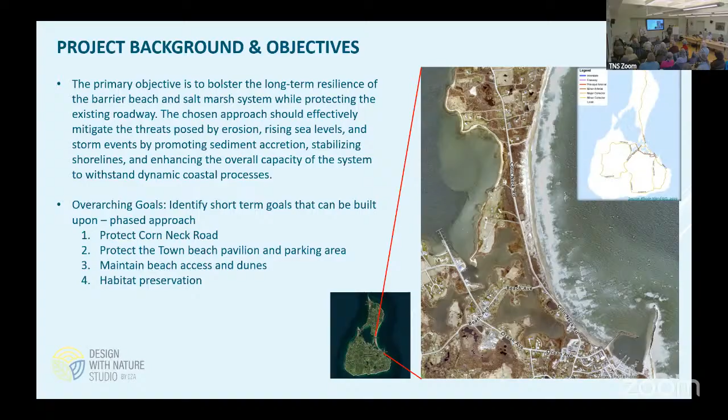This shows a number of key areas we identified during the vulnerability portion. These were also identified before we even started the project—you, as well as many others on Block Island who visit these places daily, highlighted these areas as vulnerable, which is something we also saw during our study.

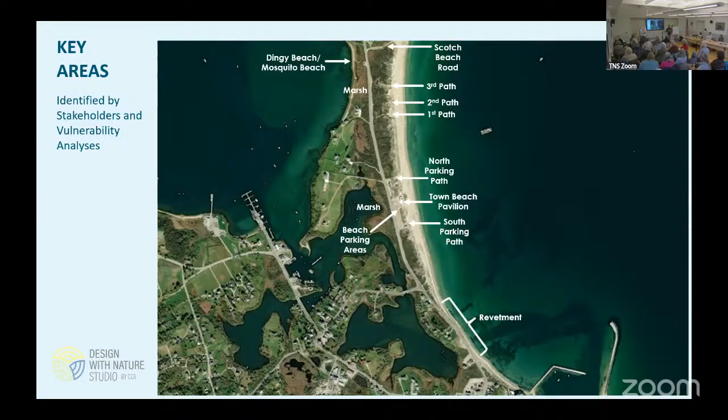As everyone probably knows, the major vulnerabilities are coastal. That typically comes in two forms around here: a nor'easter or a hurricane for big storm events, and even smaller storm events have the same vulnerabilities, just less intense. The hazards include high water levels, waves, high winds, and, especially for the parking areas, precipitation.

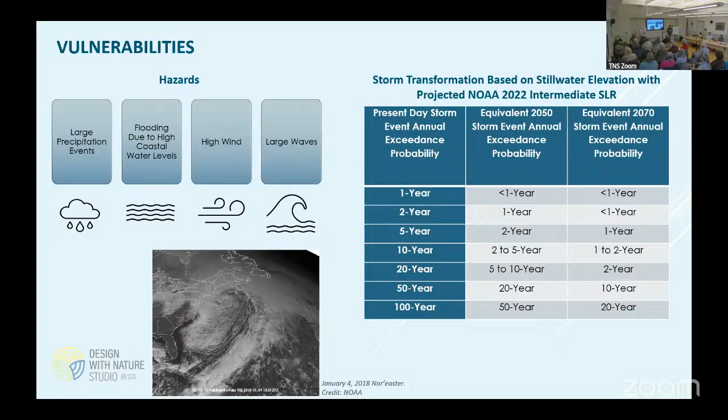This is a recap of the previous meetings. We went through an extensive list of different strategies and solutions that could be implemented—a number of nature-based solutions, all with an element of that, but we focused on some specific ones, like reef balls and dune restoration vegetation, which is self-explanatory. For the parking areas, we worked through permeable solutions. Access management is big, especially for the dune paths—you might not need much beyond signage and fencing. We also worked through hybrid shoreline protections, green infrastructure, and the potential for elevation or relocation, which is the focus of the second half of today's meeting regarding the pavilion.

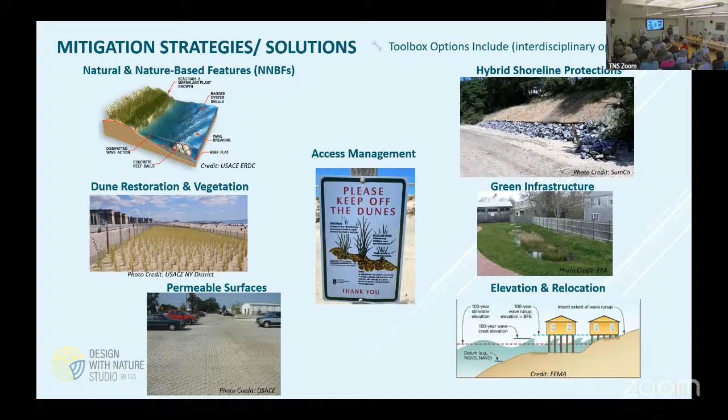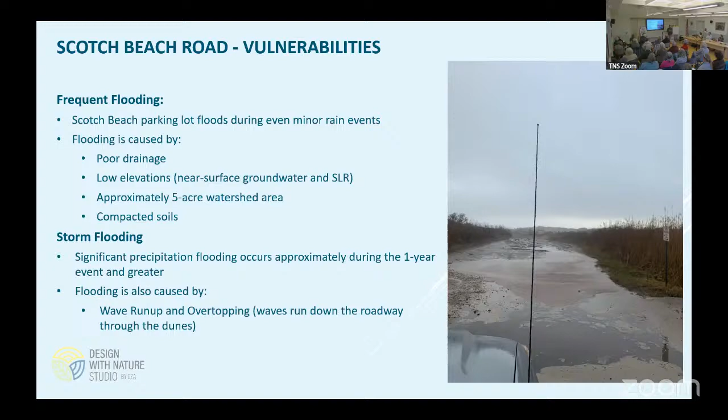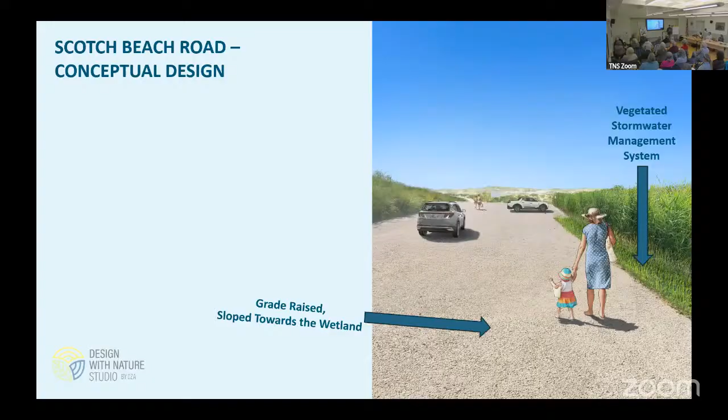Going back to what we presented last year, Scotch Beach Road and the parking area experience a lot of flooding, as you can see in this image, through precipitation events and large coastal storms—water runs up the path and down into the parking area with nowhere to go. This is one of the areas where we proposed a conceptual design last year involving simple regrading, changing the material, and adding vegetated stormwater management solutions to mitigate flooding. Since then, we've advanced that concept to a 60% design drawing, which has gone to a permitting set at this point.

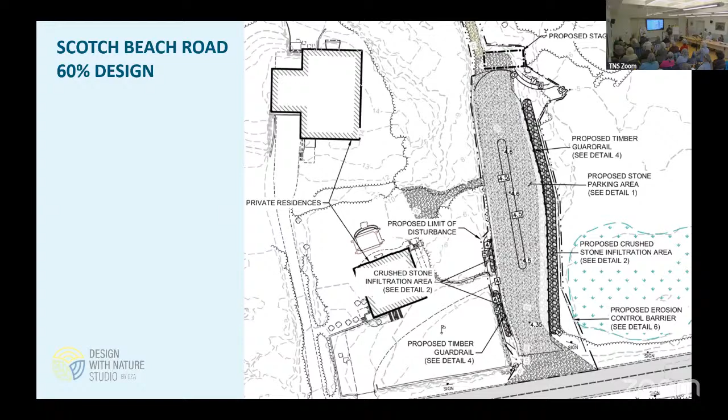The second area we moved forward on is the dune pathways. There are a number of these—I'm sure you've all used them at some point to access the beach from Corn Neck Road.

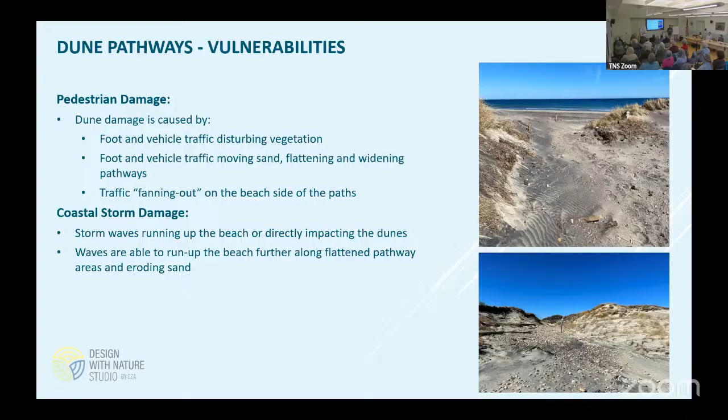They're all vulnerable similarly as Scotch Beach Road from the coastal side, whereas on the landward side, they don't really have much vulnerability to precipitation. On the coastal side, they are vulnerable to wave run up and overwash that pulls sand away, exacerbated by the widening of the pathway as people exit and head north or south. Even if you're not walking on dune grass, you can slough off sediment, and it'll slowly widen that pathway over time and allow waves to come up even further. So that's one where the vulnerability might be mitigated by some simple concepts.

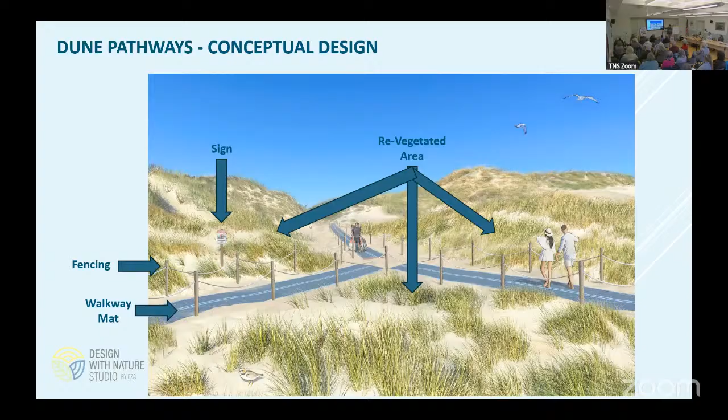So here we have what we proposed last year, where we have some walkway mats, some fencing, some signage, and some vegetated areas to break up the waves from running up the path and also allow a designated path for people to walk on. Those have been advanced to 60% design, and this is some steps from those permitting drawings here.

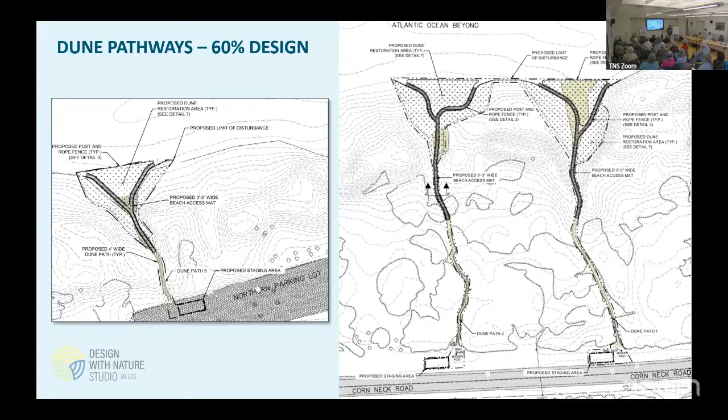Okay, that was an overview. Hopefully none of that comes as a big surprise. If so, you can come find me after. But at this point, we're really transitioning to the focus of this presentation, the discussion that we want to have later, and why we moved away from the parking area.

So that's the path that the town and the public wanted to take. That's the feedback that we received after our meetings last year, that this is a primary concern, and it is. The major vulnerability is that because the pavilion's there, the dune can't rebuild. You can see it in the winter, it does rebuild slightly on the seaward side. It wants to rebuild, but that sediment is moved away because it needs to be in shape for the summer season. You need access to the pavilion.

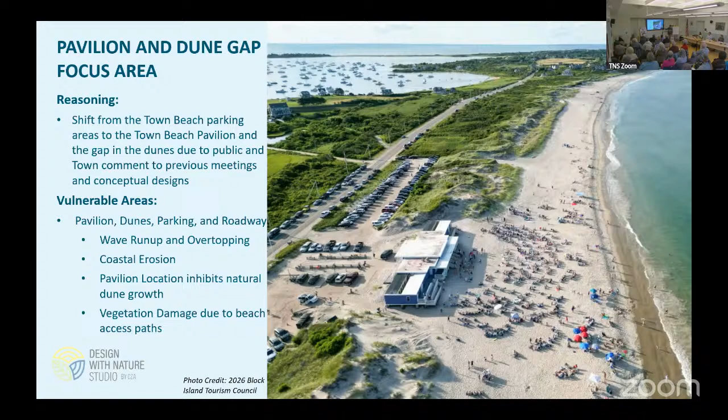So it's really hindering that dune growth. And because there's no dune there, it's very low lying. I'm sure many of you have seen waves run up during storm events along the paths on either side, wash into the parking area, and erode away the dunes on the side. So it's a vulnerability for the pavilion, for the parking area, and for Corn Neck Road.

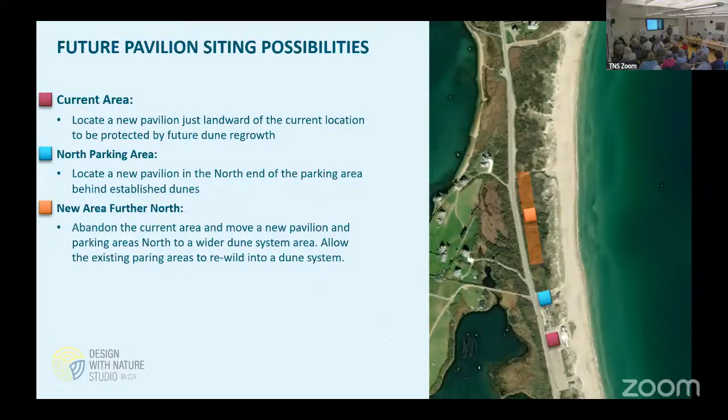So some initial advantages and disadvantages to think about before our conversation a little later, for each location — I'm going to go through those now. The first one is the current area, and I've cropped in some dunes here. So where the pavilion is currently is right here, but now we've filled it in with dunes. At this possible location, you're still central to your parking areas. That's an advantage.

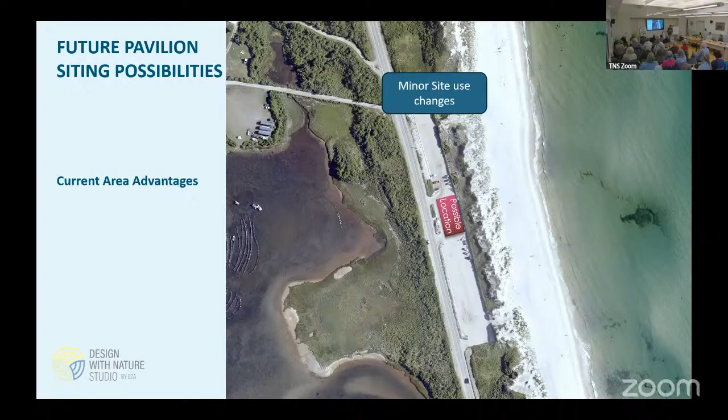There's also these wastewater and gray water treatment facility areas north and south of the parking area. Those would be able to remain in place. And overall, minor site changes. The use of the site is very similar, the feel of the site is very similar, and you're not redoing the parking areas. So those are all advantages to having it in the current location.

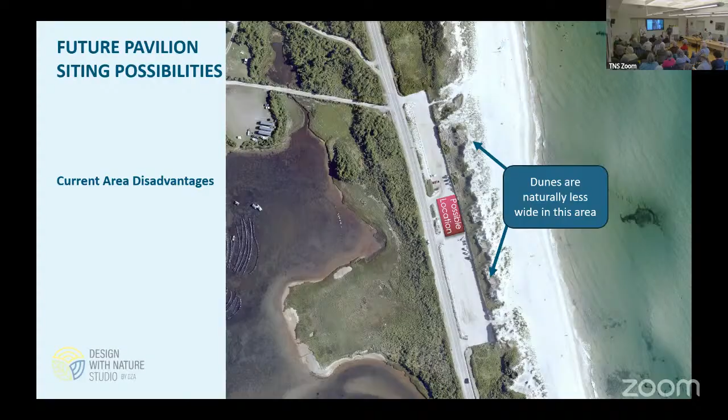Some disadvantages are, as we've discussed, there would be ponding water issues in the parking areas, as is currently, unless that's mitigated, which is on the docket. Then another issue with this location is that the dunes are naturally less wide the further south you go along Corn Neck Road. As you go further south, the dunes get squeezed and are a lot thinner, and as you get north, they get wider. So being at this location, there's a little bit less protection for the pavilion and for the parking areas than would be further north.

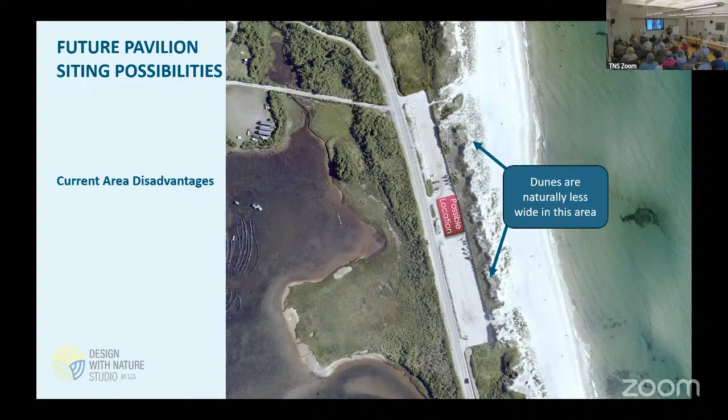Another disadvantage to siting in this area is that the pavilion would be put in place prior to the dune being restored. In this case, we're proposing a raised pavilion due to future water levels, so you would have a pavilion that's relatively high up compared to the dune in front of it while that dune is rebuilding. So access to the beach from the pavilion might be a little bit of a challenge at that point.

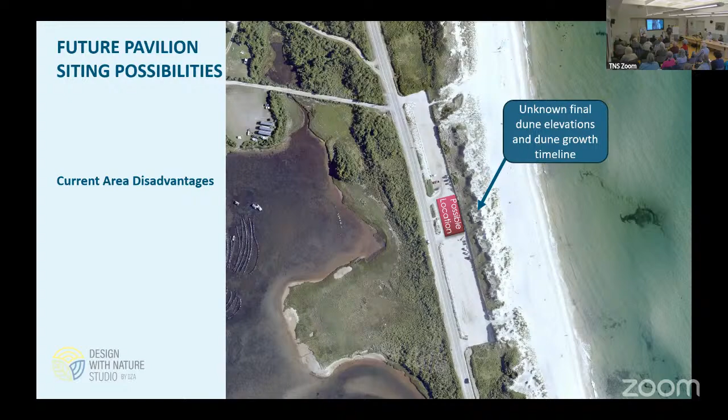And then finally, you have a loss of parking during construction. Ideally, that's in the off season, but regardless, you would have a loss of parking.

Moving to that second location, the north parking area, located maybe in this location here. You get to use your current parking spaces. There might be some reconfiguration of ingress, egress, but overall you get to use those spaces and you don't have to redo that. So that's a positive.

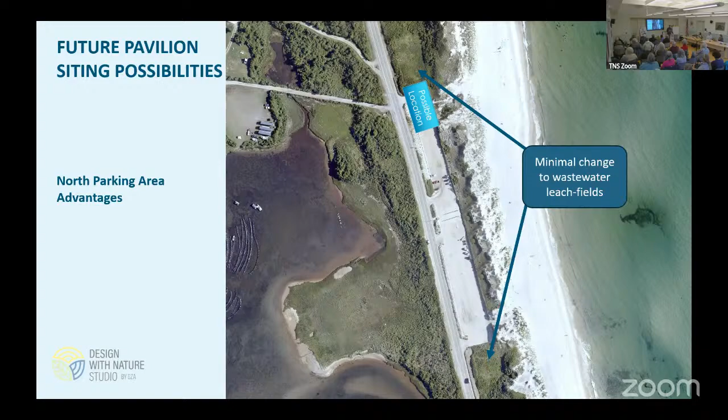Again, minimal changes in the gray water and wastewater, and minor site changes overall. Another benefit is that there's a known dune elevation, so you're setting it up for immediate protection if you put the pavilion there. You know what the dune elevations are out in front of you, what that's going to look like from the pavilion as you build it, and what access to the beach from the pavilion might look like right away.

And then another advantage is that you kind of have uninhibited dune regrowth here, which is what we want. At the end of the day, we're trying to restore the dune at this gap that is a major vulnerability. So that could be completely roped off, and the dune could regrow naturally or with some assistance like plantings and sedimentation. And the dunes are slightly wider at the north end of the parking lot than they are at the middle, so you do get a little bit of benefit as well.

Some of the disadvantages, again, stormwater ponding unless it's mitigated. Some rework of the parking area would be required. That's more of a cost and time thing. And again, you'd have some loss of parking during construction.

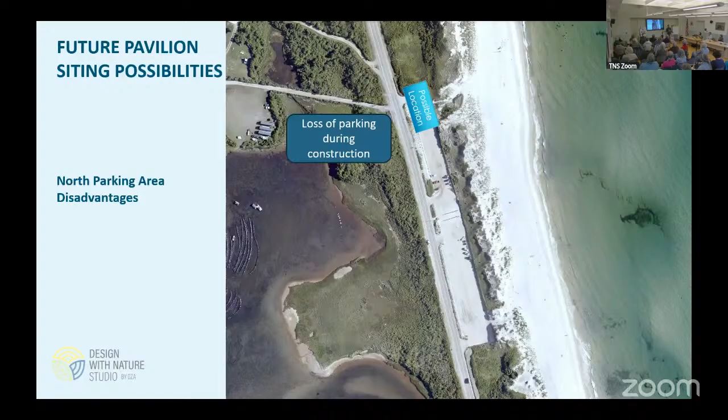And then we have the third location that we're proposing for this conversation, which is further north. So that would be moving the entire parking area and the pavilion further north. The advantage, similar to moving it just north in the parking area, is that you have those known dune elevations, and you have that immediate protection. You also have complete unhindered dune growth back at the original parking area, because once this is constructed, you can completely abandon this, with one caveat which I'll mention in a minute. And the dune system is much wider here, so that's protection for the future.

Typically with these sort of systems, if sea level rise is realized to the extent projected, then your dune is going to want to shift inward towards the land, and in doing so, you'd be losing some of that protection. But in this case, you would have a little bit of a buffer for your main primary dune system to shift landward.

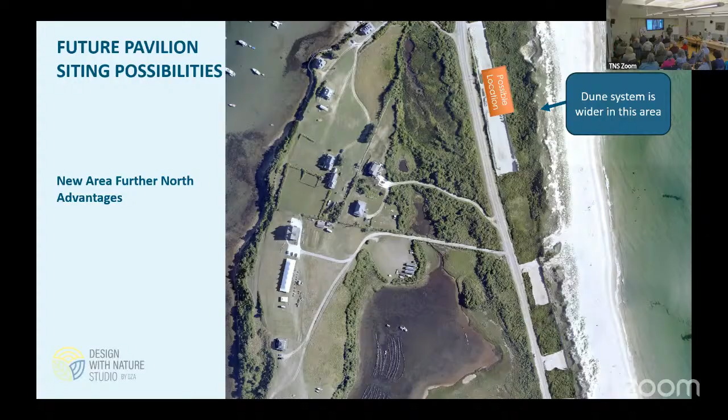Another benefit is that while this is all being constructed, you're not losing parking. You could keep the current site as is, and then when construction is finished, you can just switch sites and you have no loss of usage.

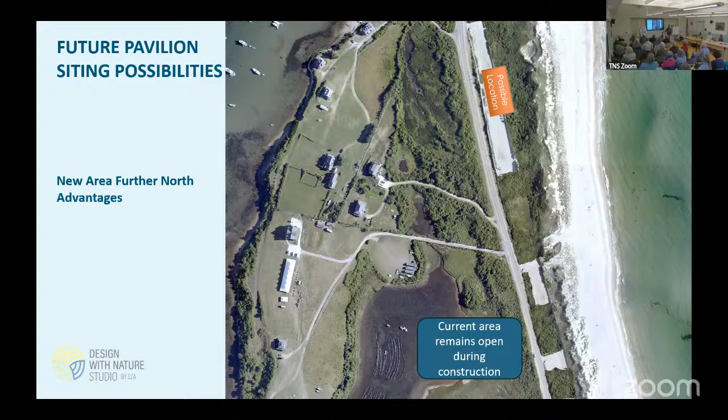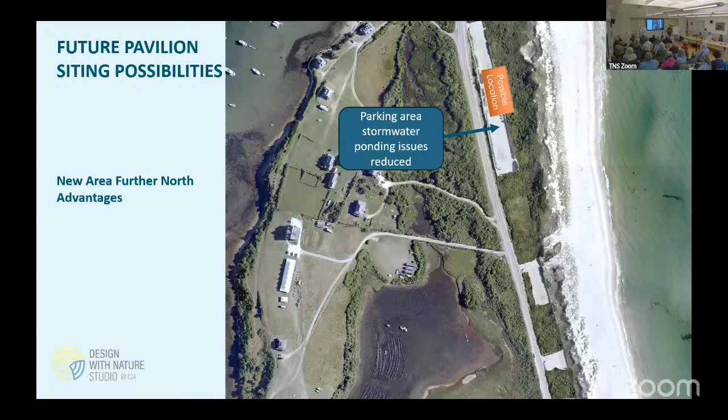Ideally, in this situation, elevations aren't much higher, but a lot of the ponding issues in the parking area that don't come from the coastal side are due to the south parking lot sitting at a low spot along Corn Neck Road. In an ideal situation, this new parking area would be sited to mitigate that as best as possible, so you'd have reduced ponding.

Some disadvantages are you're changing your whole parking area, and yes, you can let this rewild for the most part, but there are utilities underneath the current parking area that would need to be accessible. So not all of it is a one-for-one. You would have more parking area structural along the whole length of Corn Neck Road.

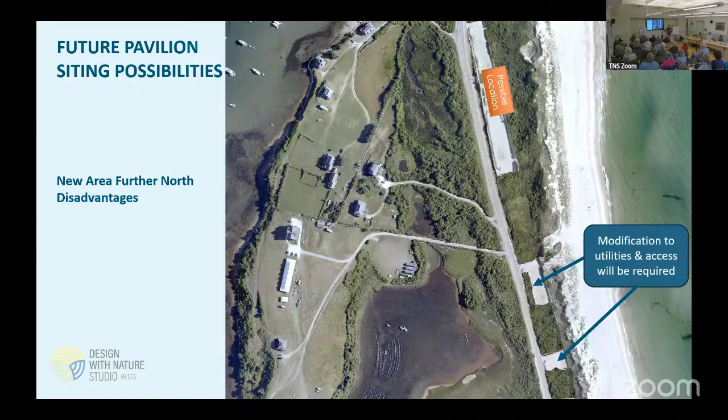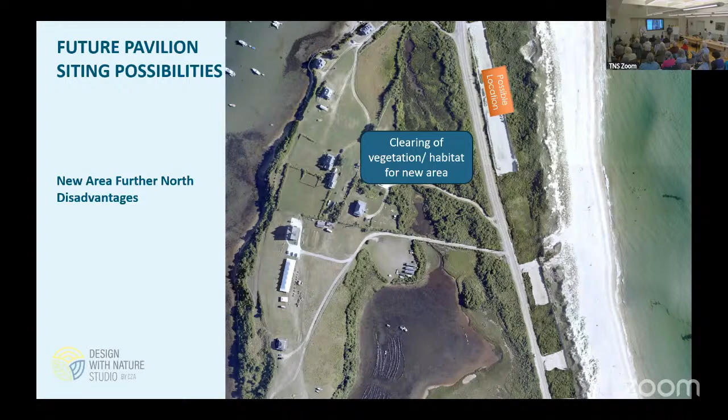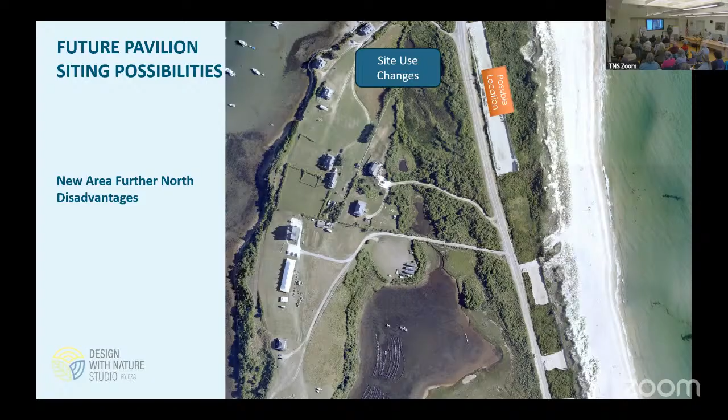Obviously, the clearing of the habitat is not ideal. There's a nice secondary dune system to the north, and that would require flattening and grading that, and removing a lot of vegetation. Then the site use changes, where everyone parks along the roadway when there's parking overflow, and just the access of the beach and which area of the beach that you'd be in. It's minor, but there are some site use changes. Along with that, there'd be a change in the gray water and the wastewater infrastructure.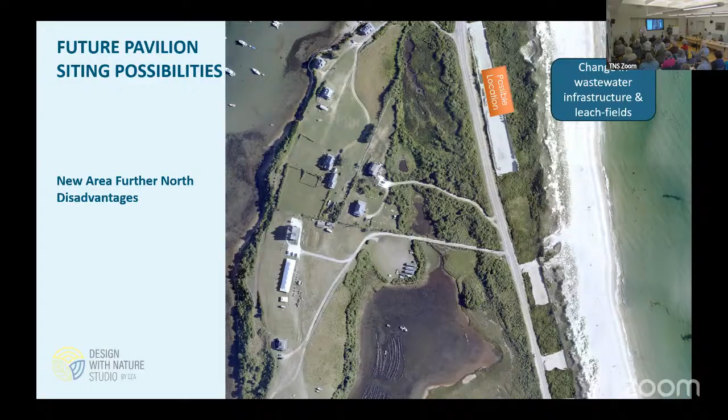With that, I'm going to pass it off to BIA Studio and Leon to present some of their concepts.

Hopefully I can get this. That didn't work. Oh, sorry, Judy. That was before the blizzard, and you go out now, you can see the after blizzard and all that too, that's gone. I was sharing my window, not my screen. Already gone. Just do this transition, work.

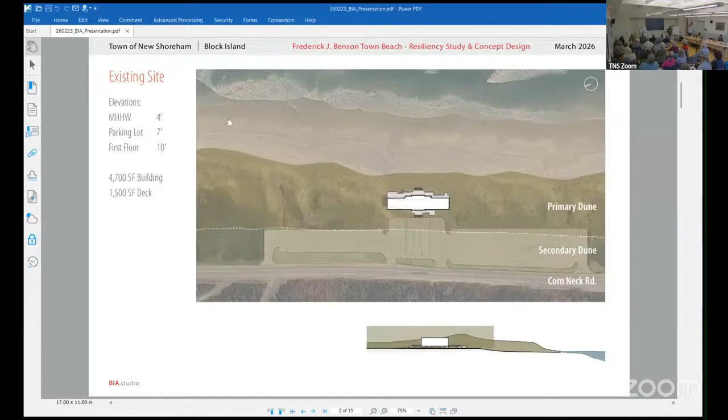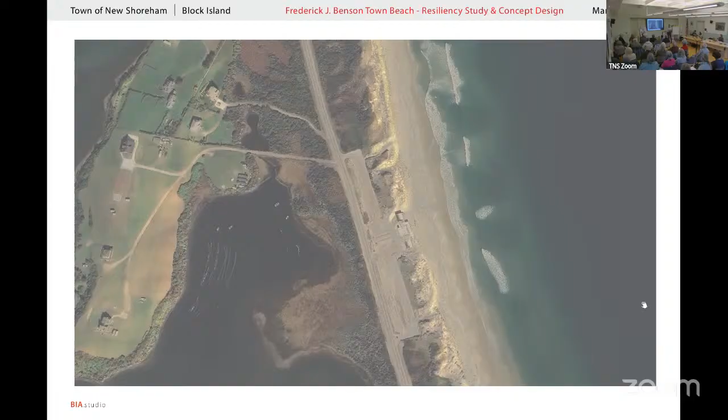So my name is Leon Davis. I'm an architect with BIA Studio, and we put together these concepts for our discussion today. As Judy introduced, really the intent with all of this is to facilitate discussion, because it's one thing to say we need to reestablish the dune.

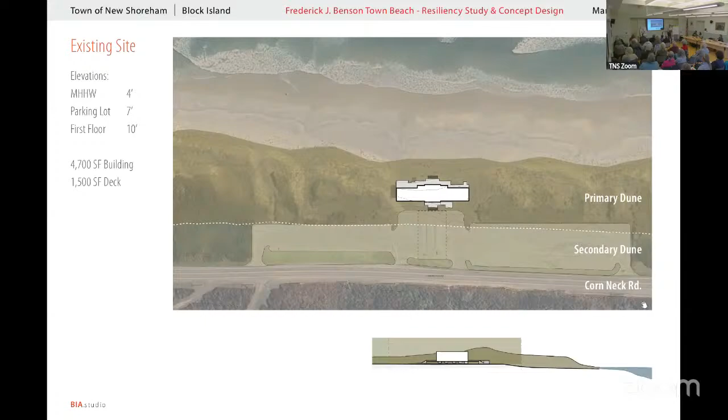It's another thing to really understand what that means in terms of now using the beach and having a functional pavilion. So this site diagram is showing the existing condition, and you can see that the existing building is squarely in the primary dune system, and then the parking lot is essentially all located within the secondary dune system. So once that primary dune is reestablished, and we're looking to now reintroduce a new beach house, the core challenge is really an elevational one.

The existing parking lot is at roughly elevation 8. So if you think of that as ground, it's the number 8. Based on building codes for being in this flood zone, we need to elevate the building and put the finished floor at roughly elevation 16. So we're 8 feet up above grade. It's elevated. That does work nicely with the now reestablished primary dune, which is obviously a big mound that we have to climb over.

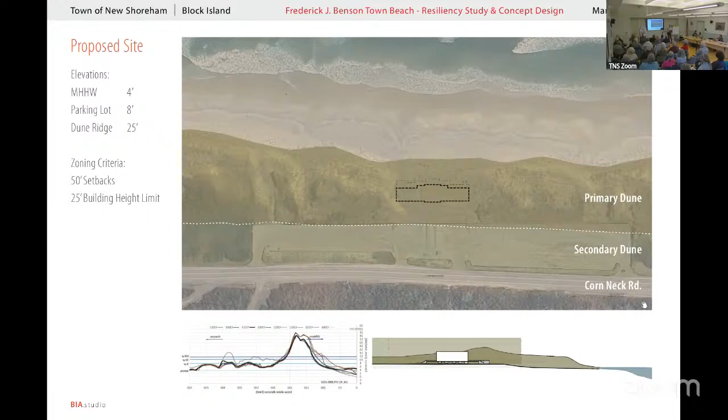So in putting the first floor of the new beach house with that 8-foot climb, you're able to transition over the dune and down. But it's a very different relationship to the beach, to the dune, and to the parking lot. To help kind of explain and work through some of the design issues related to that, we've developed these 3 different concepts.

The concepts we're showing here are essentially based off of what you have today in terms of the functions and the uses in that building. We're looking at 3 different ways you might recreate that condition on the site with some different relationships to the dune, to the beach, and different approaches to bringing users out towards the water.

As I mentioned, we have to get up 8 feet relative to grade, and that can be a bit daunting to a user who's arriving on the site. So to make that experience as accessible as possible, one thing that we're doing universally in all 3 schemes is we're using what we're calling an arrival porch, which is just a short climb up. Then from there, there's some initial program, maybe outdoor showers or the restrooms and changing, and then there's a secondary climb to go up another increment. That way you don't have to do all 100 feet of ramp in one go. So that helps us break down that journey up over the dune.

And then another thing that we're doing universally is we're looking at how to use outdoor space. I know the pavilion you have now is very much an indoor-outdoor feeling building. It's got—where's the water? The water is here, okay, thank you—so water, beach, dune.

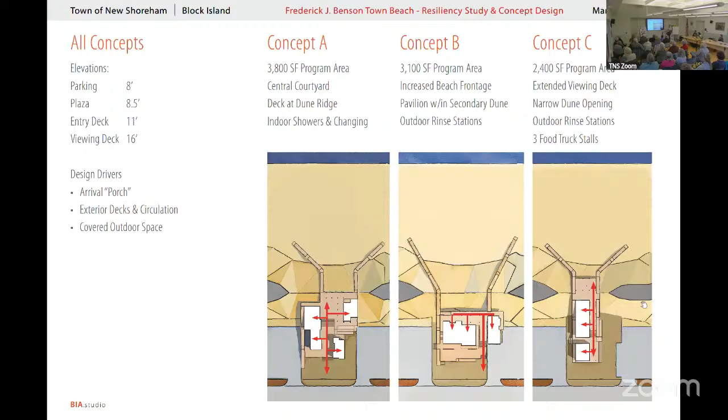So just to jump into the schemes themselves, these designs are not at all intended to be proposals, but we did want to represent what it's going to feel like on the site with this new dune, and just to help you visualize what the stairs and ramps will look and feel like, what that new relationship to the beach and to the water would be.

I'll quickly touch on, for those who don't know, what's in the building today. It's obviously restrooms and changing rooms. There's also a series of bunk rooms for lifeguards who stay in the building during the season. There's a concession stand, which I'm sure you're all very familiar with. And then there's the beach equipment rentals, first aid, and a few small support spaces, storage, and a manager's office.

So this option is basically reallocating all those same spaces in the same sizes, which is not a decision that's been made. That's just meant to be a baseline starting point.

So we've rotated now, so the water's here, and then you can see the parking lot. A few other constraints I'll just mention quickly: there is a 50-foot setback from the road. So each of these options has been basically oriented starting at the setback and then going waterward from there.

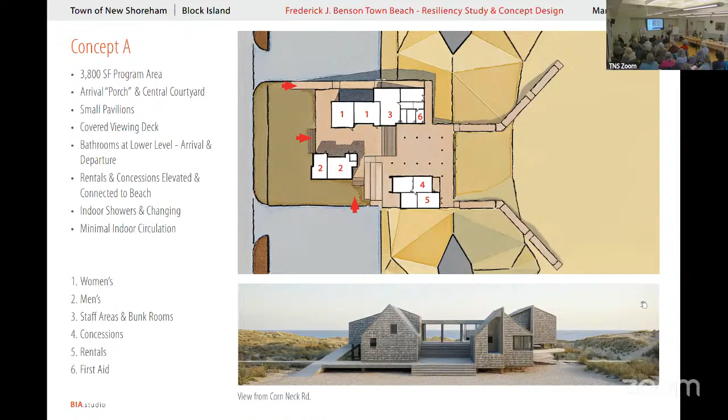So in this option, that outdoor space brings you right up so you can, in theory, still see the water. But because we're pushing into the primary dune system, as Mike was mentioning, you don't have that same kind of buffer to future dune movements, and it's not as sheltered as it might be otherwise.

So this view is just looking at that from the road side, just to give you a sense now of what this elevated building on the dune could look and feel like.

You're going to need to have some kind of access path down now to the beach from this elevated dune as well. So we're showing basically a standard structured ramp system that splays out. That's as much just for illustrative purposes, so you can get a sense of what that length would be. But you can see in this section here just how that sectional relationship works. So you've got the water, the beach, and then this would be that newly reestablished dune.

We're not actually able to let the dune in this type of scheme build fully to the ridge that it would naturally, as it's formed to the north and south of the building. So we are still kind of artificially holding the dune ridge down a bit to allow for that elevation 16 finished floor. The challenge is going higher than that means more stairs, more ramps, more climbing.

Some more detailed solutions that I think we'd have on the table further down the design process is you could design a building that could be raised incrementally in the future. But as a baseline, 16 is really the starting point. And you can see how what we've done is we've broken up that climb into two stages, so to speak.

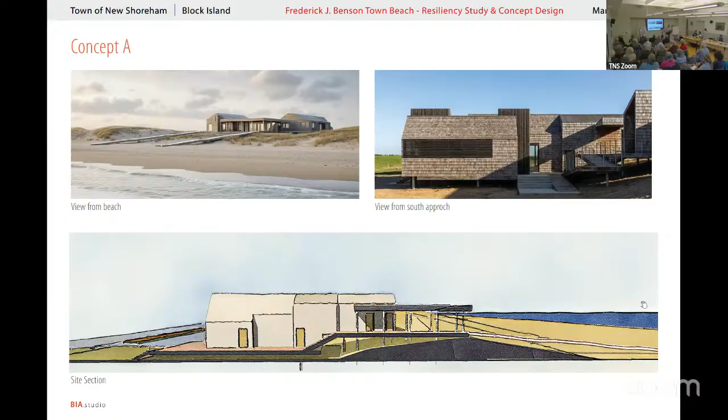So concept B, the elevational moves are all the same. We're still climbing up to that level 16, which is 8 feet above existing grade. In this option, the building is oriented 90 degrees to what we had previously. So again, the water's here, so this is much more facing the water the way the current pavilion does.

And then all of the spaces are organized on the water facing side. So your concessions, your rentals, those types of spaces are all accessed essentially off of a deck that's looking out towards the water. In this orientation, the building can be set further landward, so it's more in the secondary dune zone. So you can see relative to that dune ridge, you're back now, and we've reestablished that buffer space.

And in this option, the dune could continue to build and grow to the height that it naturally wants to be at, and you would just be left with smaller cuts essentially, as your access points back down to the beach itself.

This option is suggesting maybe there's just outdoor rinse stations and showers as a way to reduce the footprint of the building, just to help you visualize what that might look like.

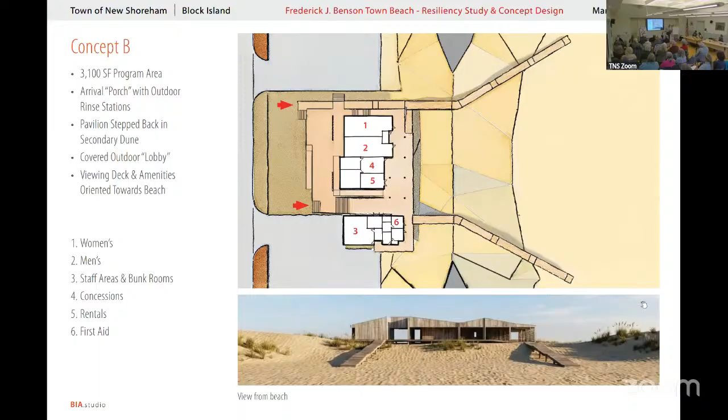And then the pavilion today has a central lobby. So in this option, rather than having an indoor lobby space, there's essentially an outdoor covered lobby, so to speak, that's meant to be sort of that covered outdoor space, but not truly enclosed.

So just some visualizations to help you understand what that might look like and how that relationship to the dune and to the water is different in this type of approach. So you can see how there's now kind of a bridging across, and then you would descend down.

The intent is that everything would be designed to universal access standards, so that would be about providing ADA compliant access down to the beach itself. But also we've heard that there's a desire for people to not necessarily want to navigate the sand and just have a viewing spot. I know we've heard people like to sometimes just drive and sit in their car and look at the water. So we're thinking about those types of interactions for people as well.

But ultimately that's what today's about too, is to learn from you what's important to you and how you use the site and how you would like to use the site in the future.

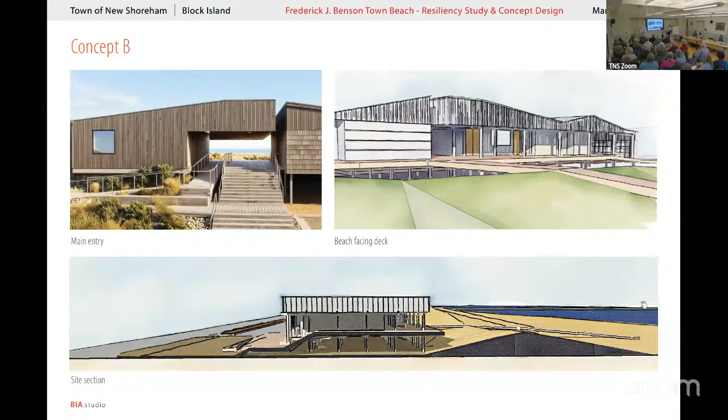So this third option, we've taken the smallest footprint. So we're looking at more mobile solutions with food trucks and things like that to help reduce the built area even more. In this option, the bathrooms are located at this first lower porch elevation.

So they're more associated with the parking lot, so to speak, which works well from an arrival standpoint, but it does mean traveling further to get to them from the beach itself. And then in this option, the bulk of the program is oriented, again, with the water here, kind of perpendicular. And in this scheme, we're pushing out an observation deck beyond the ridge of the dune, so to speak.

So this orientation allows for a narrower aperture in the dune, so to speak. It's a shorter frontage facing the dune system and the water. But it is, again, restricting the height that we can elevate to at the dune crest. What this does give you, though, is that covered, potentially outdoor space that's very much out into the beach environment, if that's something that's important to you.

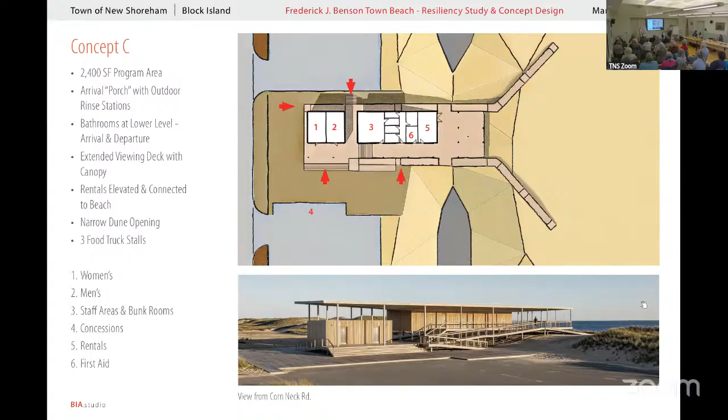So the dune in this scheme is filling in, but it's not filling in the ridge on either side of the existing pavilion, which today is roughly 25. So we're talking about setting this building at 16. So where the building is at in this type of orientation, obviously the dune is not going to reestablish to a continuous 25 all the way across. So it would fill in, but it would not fill in to the full height.

So that is sort of a relationship between the pavilion, the dune, and the beach, that there's a compromise to be made, or a decision to be made about what's your relationship. Is it fully behind, and we let the dune build to the maximum that it wants with small connections through? Or is it that universal access idea where we want a building that's still on the beach, so to speak? Or is it something in between? These are really just meant to help you visualize those relationships and what that means.

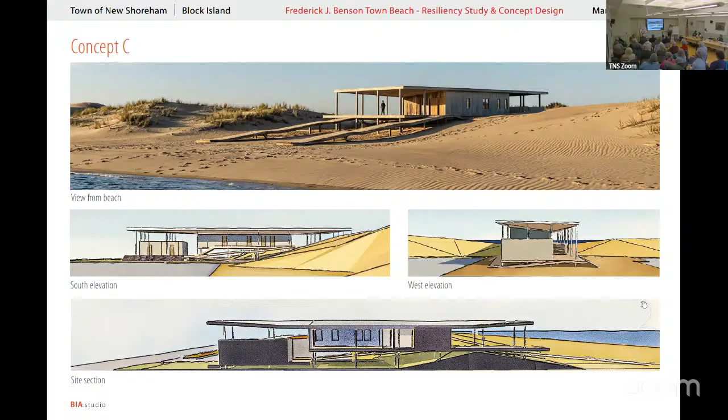Here you can see that deck is pushing out the furthest relative to the three schemes we put together. So just in summary, you can see how those apertures are very different, right? Relative to that dune ridge, in one scheme the pavilion and outdoor space has pushed out the most, bringing you the closest to the water. In this one, we're the furthest back, respecting the dune to the maximum extent we can. And concept A is sort of in between, bringing an outdoor deck roughly out to the dune ridge.

As Judy mentioned in the beginning, these are very much mix-and-match concepts. You could say, I want a small footprint, but I want it all the way back in the parking lot. All those kinds of decisions are on the table. Hopefully looking at these plans and images helps you visualize what some of these decisions mean, because that's ultimately what we're trying to convey, to help enable you to make informed decisions as you think about what this might look like in the future.

So I think ultimately, as we move into the breakout group session, what we're looking to hear from you is: how are you using this building now? How do you access the beach today? And then, with the understanding that protecting Corn Neck Road means reestablishing this dune, which is changing your relationship to the beach, how would you like to use it in the future? And what is going to best serve your needs, so to speak?

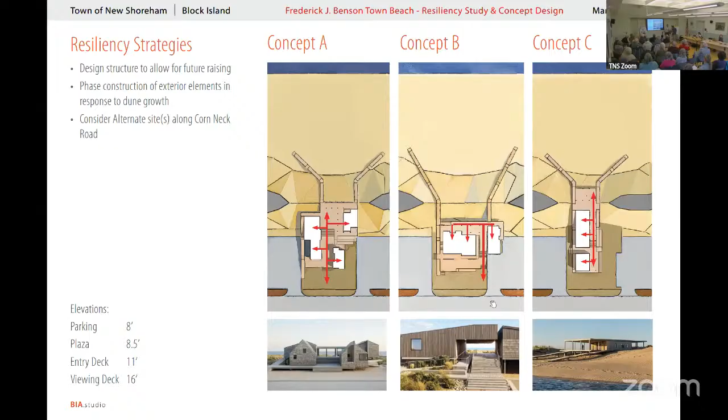Hey, Liam, can I just say one thing to both you and Michael and your teams? This is terrific stuff. I mean, regardless of whether the community settles on any of these, I think it accomplishes what you said you set out to do, which is have a range of choices that create conversation. So thank you. Thank you.

I did just want to share one more thing before we close out and go to the breakout groups. I'll let you. Just one more slide, bear with me here.

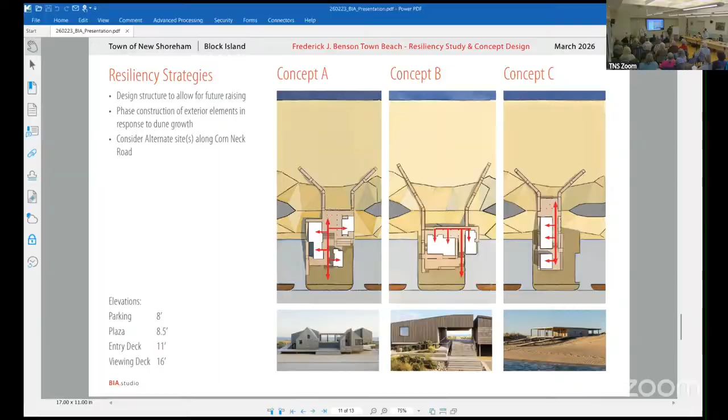I think that's all that we have now.

Douglas, question. Yeah, I have one question for you, Michael. Since there's quite a big investment to make this happen here, and there was discussion that the dunes are going to move back over time, and I know the committee's trying to do everything naturally as possible, wouldn't it make some sense to think about doing something in front of the beachhead, in front of the building itself, to kind of delay that in that area? Putting the rocks in or whatever.